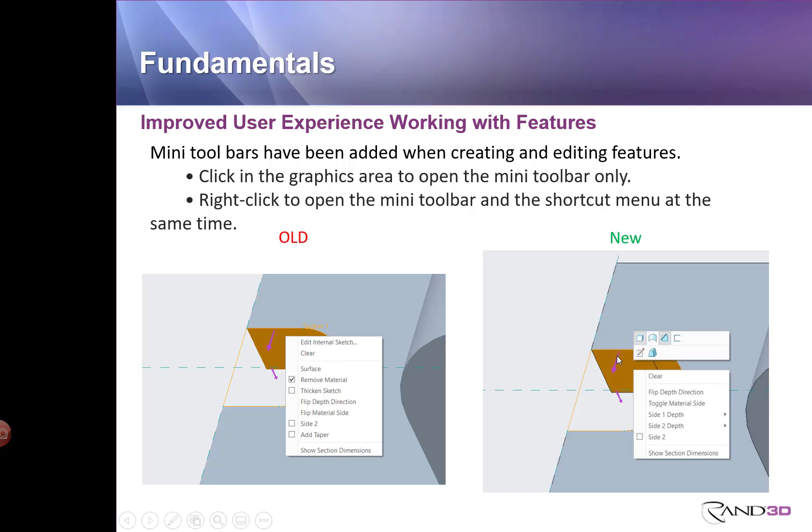You can select on an edge, a surface, a point, or whatever it might be, and it'll show you the mini toolbar of functions that would be available in our dashboard anyway. If you right click, you will see the contextual menu appear. Some of the things that used to be in the contextual menu have now been added to that mini toolbar. For example, Edit Internal Sketch used to be available only if you right clicked on it. Now, when you select on it, this icon gives us the Edit Internal Sketch function directly.

Another update is when you're modifying a feature and you have dimensions, you have the option to have a little window display behind the dimensions. It helps them stand out a bit against the background of the model. To turn that on or off, go to View, go to the Show group, and you have this icon that looks like a little box with a dimension and an eyeball. You can turn that on or off, and it will display the window or turn off that graphics window. The old interface did not have that option.

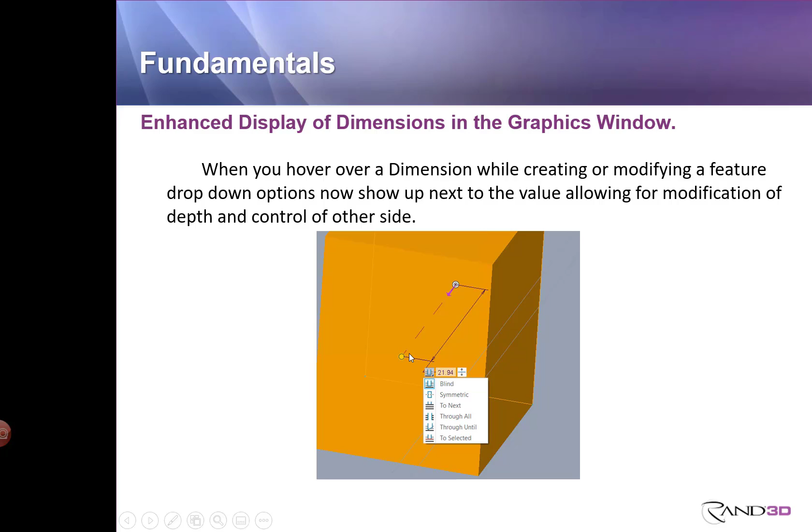Also, when you're modifying a dimension, if you hover over it, it will show you drop-down menus on the right and left side. These are directly attached to the dashboard happening at the same time, so you can always go to the top of your screen to control the dashboard. If I hit the drop-down arrow for the option on the left, it shows different depth options. If I go to the right, I can make it go in both directions, or change what elements I'm dealing with. Before, in older versions, you had to right click on the little dot at the end of the extrusion to get that to show up. This isn't just for extrusion—it can happen in the revolve command or any other command where you're defining a depth or an angle.

An improvement to Creo 6 is that if you have your navigator on the left, you've always had the ability to add columns to the table or tree. To do this, go into settings and customize the tree, and we can add whatever information we want. As long as that information was filled out in the model, it would now show up in the tree.

In the old setup, you had to grab the handle on the right side of the navigator and stretch it bigger or smaller, or adjust column sizes by grabbing the handles and manipulating them. Now, once you add columns, this icon allows you to quickly collapse and expand the tree so you can turn them on when needed and off when they're in the way. Select it once, it collapses; click again, it expands and shows those columns.

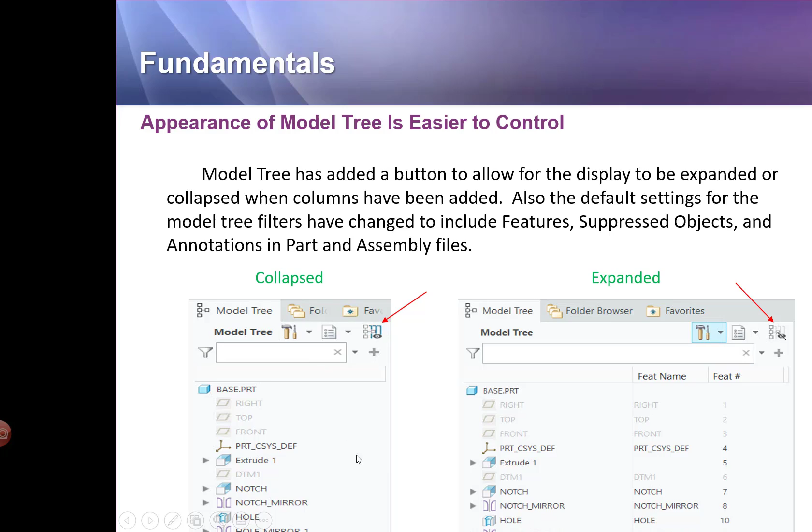Also, a change that's happened is by default, features, suppressed objects, and annotations in the part and assembly tree will automatically be displayed. In older versions of Creo, if you suppressed a couple of objects, they would immediately disappear. You could go to settings and customize the filter to show those suppressed objects, but you had to remember to turn those on. Now by default, they're already turned on for you.

Changing from fundamental changes to part design specific changes: when you're building a datum point, inside the datum point command there's a new project command or function. First, you'll select on an existing datum point, curve, endpoint, or vertex. After selecting the point you're starting from, you'll choose the datum point command. You'll see the point you selected listed here, and if you hit the drop-down arrow, you'll be able to choose project.

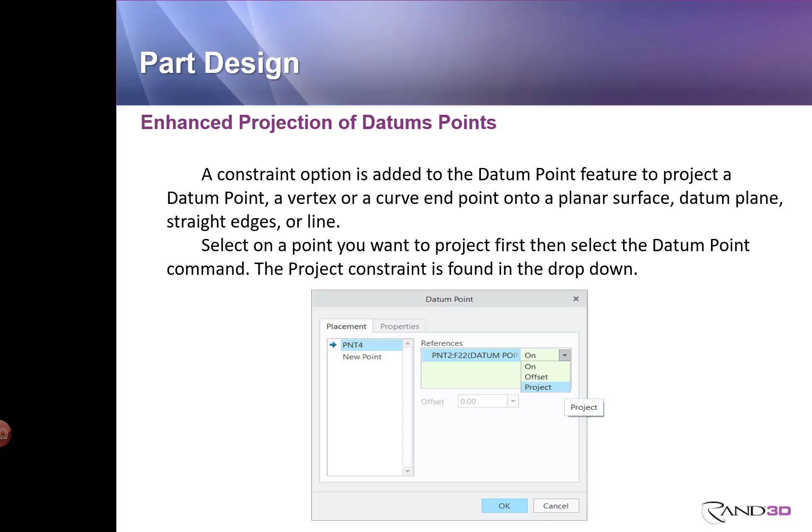Now you get to select what you're projecting it onto. You can project it onto a surface, a datum plane, or an edge or a line. Select on that other reference by holding Control, and when you hit OK, it'll project it normal to that reference.

Also, a minor change you may notice is that when creating an extrusion for the first time, the formula used to guess the value has changed. I don't know how it was coming up with the old value, but it basically picked a number to adjust that extrusion. If it guessed wrong, you had to go in and adjust it, but that number could be all over the place. Now the formula bases it on the sketch you're using.

Here I drew a sketch of a square with sides that were 5 millimeters long. When I go to extrude it, it averages out all the dimensions and comes up with that average value, which, since it was all 5, is the extrusion value. You can change it to whatever you'd like, but it tries to guess how far you want this extruded based on the dimensions you put into the sketch. This involves less zooming in and out to adjust the extrusion value than the older context did.

Another small improvement is when you're building a helical sweep or helical sweep volume, either one, you still build it the same way as before. However, under the References drop-down menu, there's now an option to create a helical trajectory curve, which the old setup did not have. If you check that box, when building the volume or helical sweep, it'll still create the same geometry, but also creates this wireframe helical curve that can be referenced.

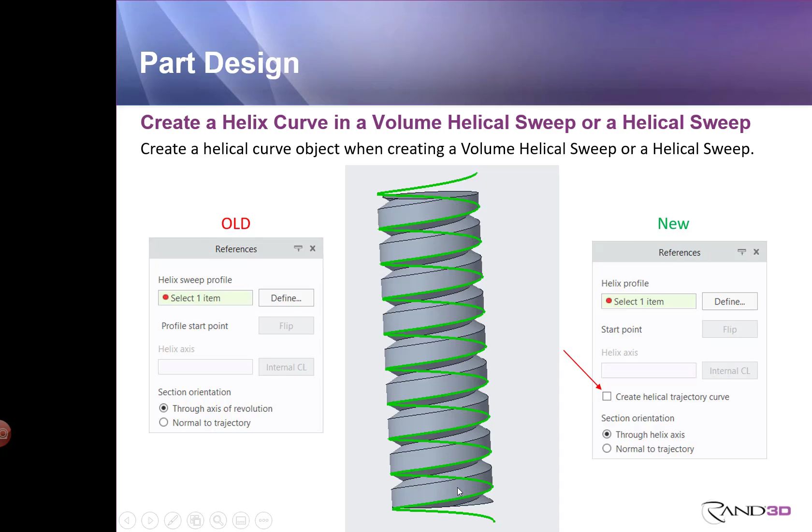The final change for part design specifically is an update to the formula generating your midplane. You build the midplane the same way as before: choose the plane command, hold Control, choose one plane and another plane that are at an angle to one another. The idea is that the formula now guesses better what midplane you actually want and doesn't require you to flip between bisector as much, so it tries to keep it over the model instead of off to the side.

I chose these two green surfaces by holding Control and selecting both of them. It created this midplane, which is at a 45-degree angle relative to the green surfaces. If it does guess incorrectly, which it still could do, you can hit this drop-down arrow and pick the other bisector. It'll move 90 degrees and come in perpendicular, splitting the angle between those two perpendicular planes from the other side.

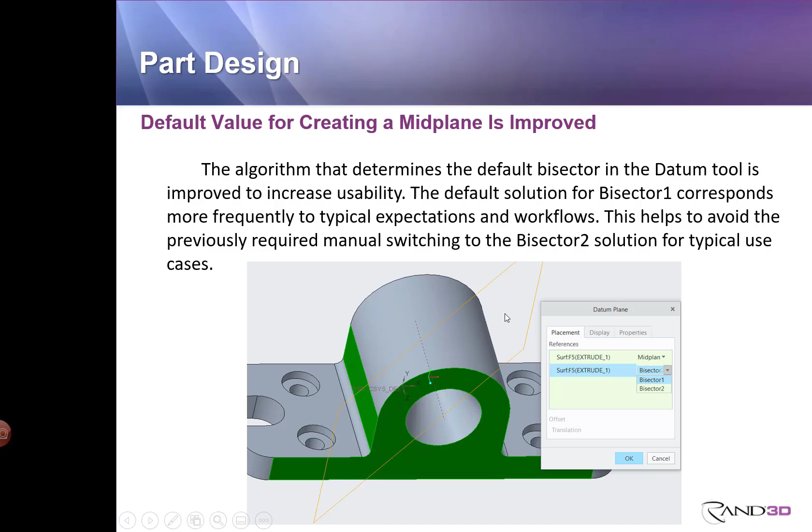Assembly design. So when dealing with assemblies, something that actually works in both assemblies and in part files is the reference viewer. Here I'm showing a part file, but it works the same in assemblies. Reference viewer allows us to see the dependencies between two objects, the parent-child relationships of how they're connected or linked.

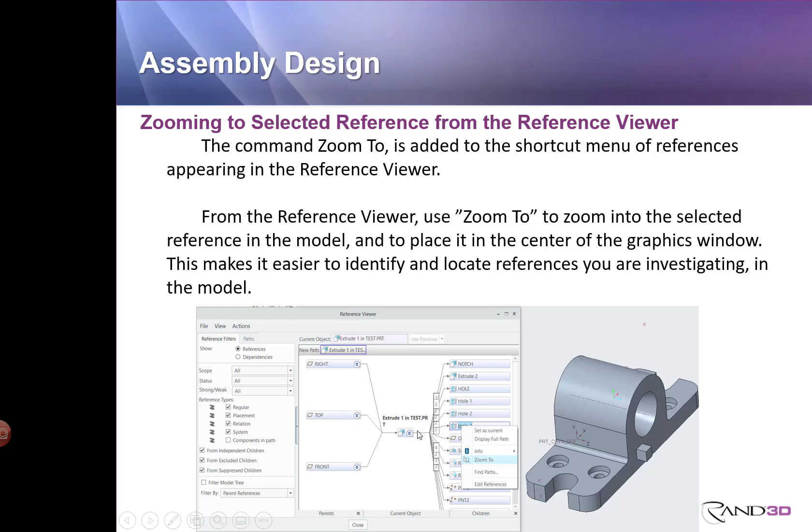However, the new function here is if you select on something, instead of just highlighting, you can right-click and say Zoom to, and it will zoom in on that specific object on the model or in that assembly. So if you've got a large assembly with lots of components, and a small part that you know is constrained to some other bracket or feature, we can see that part, right click on it, say zoom to.

And it will zoom in exactly where it is on the assembly as well. Another improvement that can affect both a part file in an assembly or just standing by itself is the inheritance feature.

Inheritance feature is going to allow us to create customized components from an original piece of geometry. So if we've got a widget and now we want a new widget that's a little bit longer, a little bit shorter, we can have it inherit from the original widget and be able to change the dimensions that make it unique.

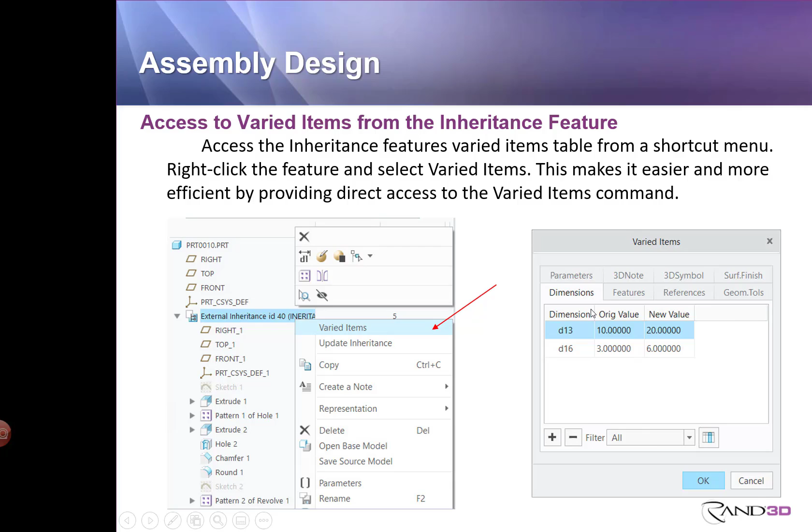The new function here is when you create a varied item, if you right click on that varied item, that inheritance feature, you'll see varied items available to us in the drop-down menu. That wasn't there before. When you select on it, it immediately shows us what dimensions are being controlled and gives us more direct access to being able to control those varied items. Again, you can do that within a part file by itself or within an assembly.

Also, changes within the assembly. We have an update to the insert here and the activate command. So when we're dealing with the activate command, in the old setup, when you activated a component, it would simply put the little green dot next to it.

Now, in the actual display, the part would be its normal display, but all the other parts would gray out. Now, if I activate that same component, it is the same display in the tree where it's white, and all the other components gray out within the tree. So not only is that happening on the display of the assembly, but it's also happening in the tree, allowing you to focus more on specifically that component.

Remember that features are automatically displayed within our Creo 6, whereas in the old setup, features are not automatically displayed. I'd have to go to settings and turn that on to be able to get them to be displayed. We can see that automatically, so that's also different.

The other change with our tree in the assembly is the insert here. In the old setup, insert here was listed underneath usually your top level assembly, and if you were looking at a specific part, it'd be listed underneath the part level as well. In Creo 6, the green line and the blue line represent the insert here. It does the same thing, it just changed the way it looks.

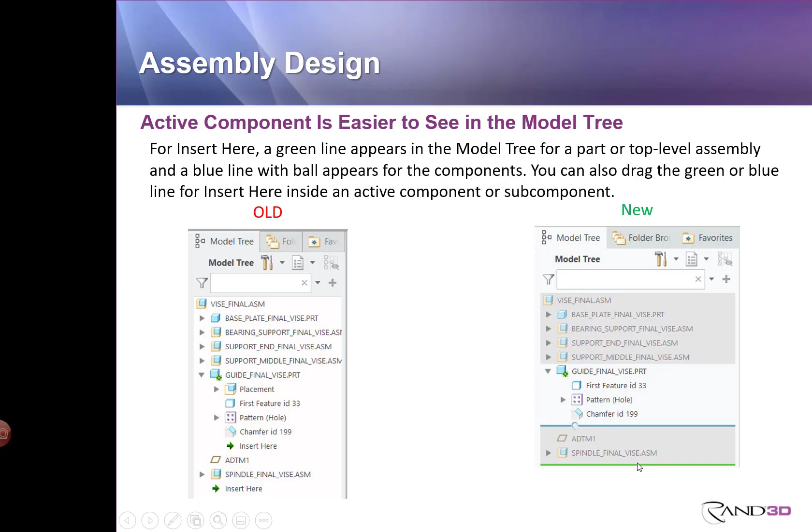Another minor change within Creo 6 is with the intelligent fastener function. If you've already placed one fastener in a hole of a pattern, and then use intelligent fastener to place another one in a different location, if it's going to duplicate that fastener on top of an existing location, it will give you an error message telling you a fastener already exists in this reference and asking if you want to continue.

You can still double it up if you need to, maybe because you're using a different fastener, and then go remove the old one afterward. But in older versions of Creo, it didn't recognize that one already existed in that hole, and you could end up with double fasteners.

Detailed drawings: when doing drafting changes within Creo 6, some noticeable differences are with the note command. Here we've already created a note with a leader line. We're modifying it, so we select on that note. If we want to modify the text, we can click on Text Editor, which allows us to type in whatever text we want and insert symbols.

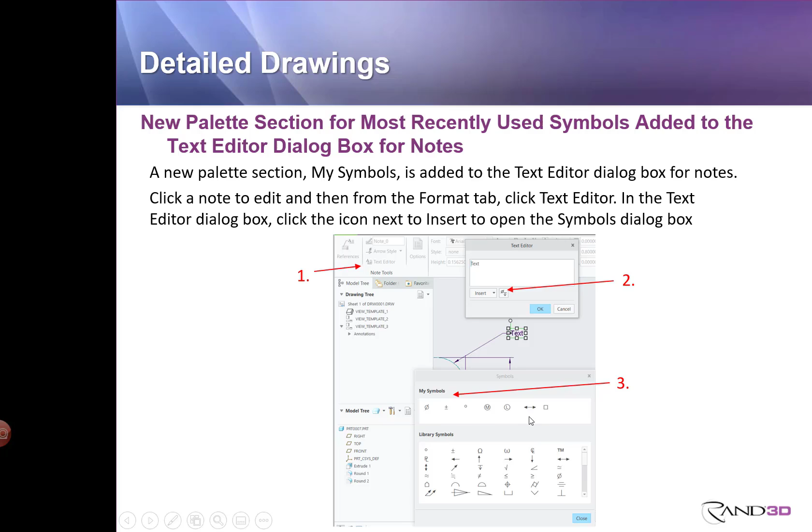If I choose this icon here for symbols, something new is the ability to have my recently used symbols separated from the entire library. If you're constantly using certain symbols in your drawings, they'll automatically be displayed here. As you pick a new symbol, it shows up first in the list and the oldest one drops off. It keeps a running total of the 7 symbols you've used recently, and when something else gets used, the oldest one drops off to make room for the newer one.

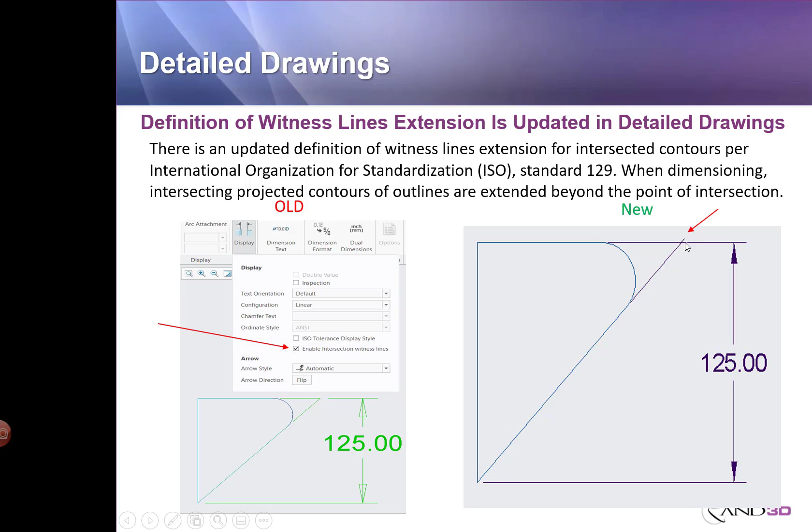Another change you may notice in detailed drawings is when you create a dimension where a witness line is needed. For example, here we have a round placed on this corner, so the corner no longer exists, but we want to measure to where that corner would be. I know you can just select this line and get the same thing, but some situations won't allow that. In the old display, with intersection witness lines enabled, it would just come to a point. In the new setup, those lines overlap one another slightly. The depth of that overlap can be controlled through settings in Creo, but by default there will be overlapping as opposed to just a connecting dot.

Also with notes, there were a number of changes. One is that the general interface for the dashboard has been updated. Here's the old interface, here's the new interface. You can see there are a lot more commands and customizations that can be done.

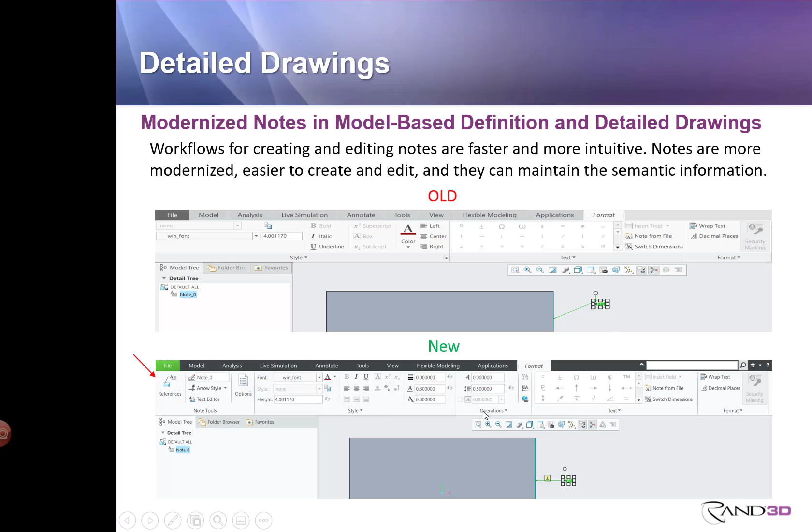Also, when placing a note, if you select the reference you're tying it to, like this side, as you go to place the text it will snap to different references. Here I moved it out where it's going to be perpendicular to that line, it shows it snapping there and I can place it. Or if I moved it up, it would show it's tangent to that line, along with all the other references you can customize and customization of semantic information to make sure it's meeting your standard.

Another update, which in my opinion is well overdue, is within the detailed drawing functions of Creo when building a new drawing file. So File New, select drawing from the list. There's a checkbox to use the drawing model file name. Whatever CAD file you're generating this drawing for, whether it's a part or assembly, if you check that box, it'll automatically make your drawing file have the same name as your CAD file. If you turn it off, you can type in whatever name you want, but it will automatically link the two and make them share the same name, which is usually what we want.

Another minor modification: if you're dealing with a table and click in a cell, the delete key will now delete the contents of that cell. Before, the delete key would delete the entire table but would not delete the contents. In the past, you had to click delete contents, either by right-clicking and choosing that, or going to the dashboard to grab it. But now the delete key will also allow you to clear the contents of a cell.

And the last set of changes we're going to cover is sheet metal functions within Creo. The first thing we're looking at for sheet metal is the flat feature.

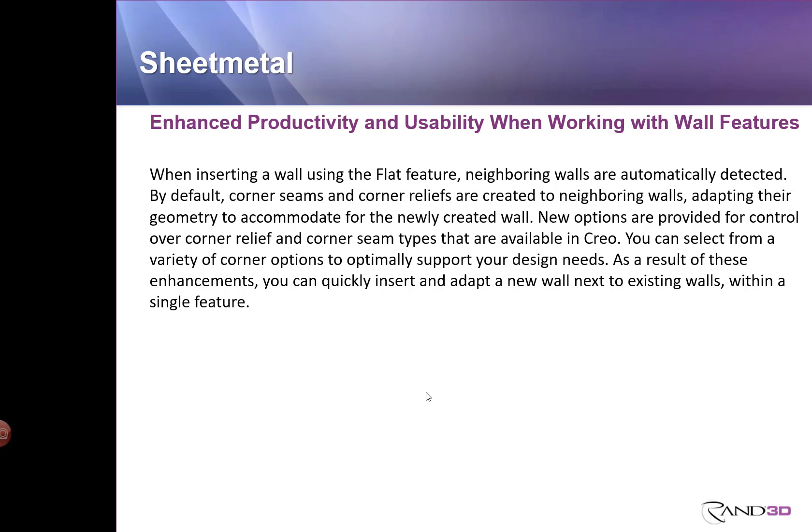When using the flat feature to create walls, it will automatically detect neighboring walls and allow us to adjust the reliefs and corner seams of those neighboring walls without having to go back and modify them or build something on top of those elements. To show you examples of that, here I created a sheet metal bracket.

I had one wall already placed. I'm building a secondary wall that happened to butt up against it. In that secondary wall, before hitting the complete function, I went to corner treatment, one of the menu options, and chose corner 1. I can adjust that corner and automatically adjust the neighboring wall as well.

So when I say create with seam with a gap, two times the thickness of my sheet metal, it gives me this result. If I change that from gap to open, it gives me this result where they're butted up against one another, but the bottom is open.

I can choose with overlap, and here one side is overlapping the other, so the front wall is overlapping the side wall. And here we flipped it by hitting the flip command. Now the side wall is overlapping the front wall.

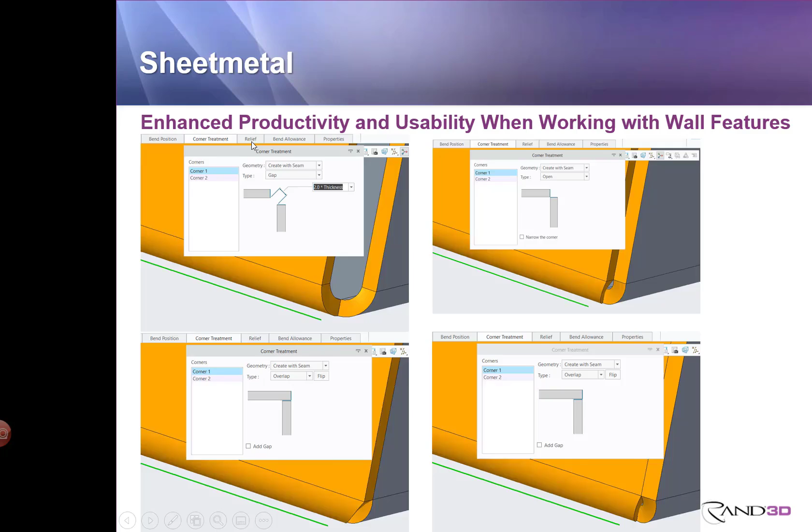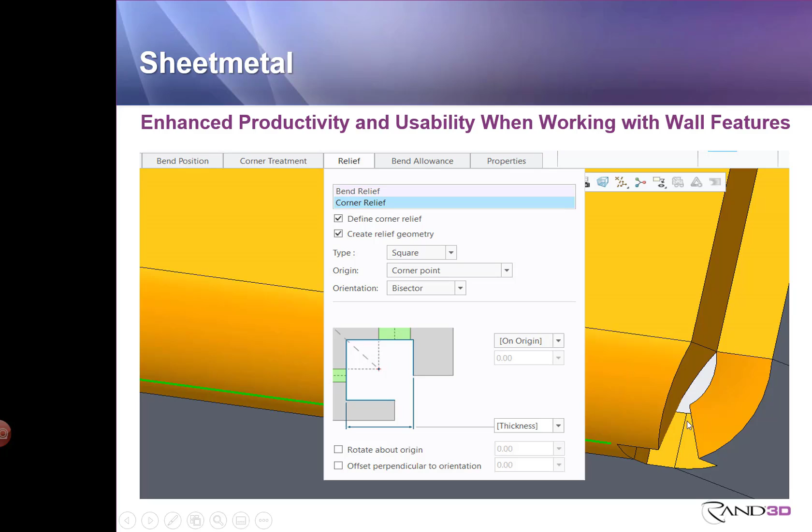Also, if we go to the relief tab up here at the top, it gives me options to customize the corner relief. I can select on corner relief, choose my type. Here we did square, we could do round relief or tangent or whatever we might need. And it adjusts that corner relief for both walls at the same time.

Now the mini toolbar does come into play when dealing with that flat or flange command. So as you are working with it, if you select on different references, you will get options to appear, allowing you to control the reliefs and control the bend, a little bit more quickly than necessarily having to go to the dashboard and choosing those options.

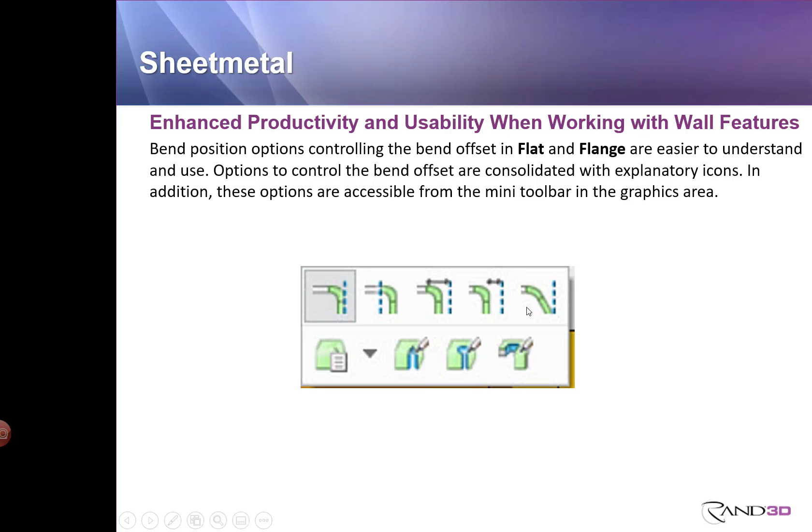Another update to Creo 6 regarding sheet metal is improved regeneration performance when dealing with sheet metal cuts. So when you hit regenerate, it's supposed to regenerate faster. It does this by ignoring certain types of features that have not been modified from previous steps. So if you build 20 features on top of one another and then build the 21st, if building the 21st feature didn't modify the first 20, it won't have to regenerate all of those. It'll just regenerate the ones that have been changed or modified, and should update faster for us.

And the last thing here is the merge wall command has been modernized. Basically, the interface looks more like the standard Creo dashboard interface than it does the old Pro E interface that, if you've used Pro E in the past, you may be familiar with.

To find your merge wall, you would go to our sheet metal function, go to model, and I believe it's under the edit group, in the drop down menu. There's a merge wall. The new function will show us this, where we're able to select our references and our drop down menus.

The old interface gave us a contextual menu where we were able to add or remove elements, define our features, and hit OK to complete them. Here we're able to hit the check mark.

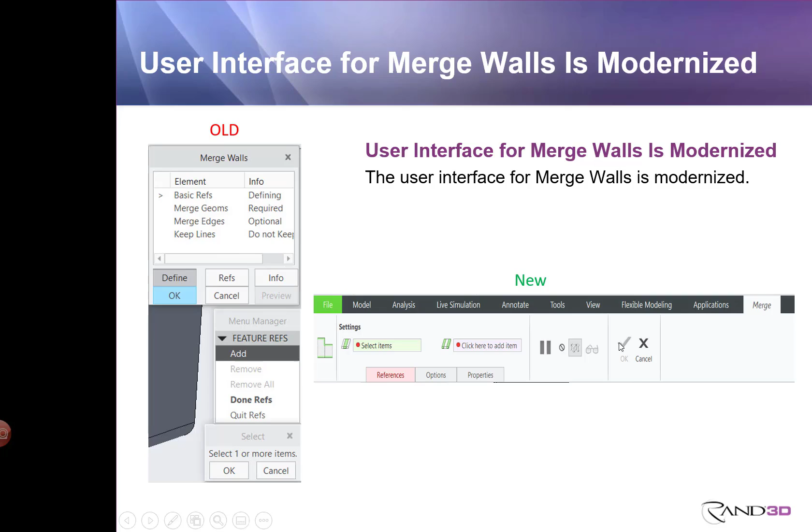And those are some of the updates, most noticeable changes and updates to Creo 6.

Taking a look at some of the fundamental changes that we have in Creo 6, the first thing you may notice is that some of the commands do have a different dashboard design to them. So for example, if I come over here to extrude, the icons and where things are located in the dashboard have changed.

There's also kind of a description describing what is involved to create that feature. Here we're looking at extrude. If I hit cancel and go to build a revolve, we see that things are just located in a different spot, though functionally things still work the same way. You may notice a different slight design change.

Other changes are that while the mini toolbar is something that was added in 4.0, the mini toolbar is also available when editing a feature, not just when creating a feature. So you may have been familiar with, if I select on something, getting the mini toolbar to pop up when you're going to modify an element.

However, when you go to modify that feature and actually get into editing that, the edit definition, now if I select on an element, we get a mini toolbar that pops up as well, allowing us to get to most of the same options we have in our dashboard.

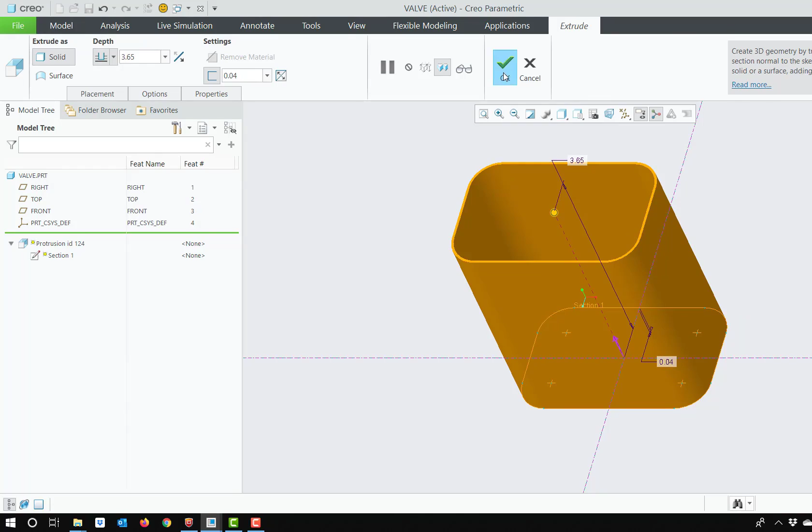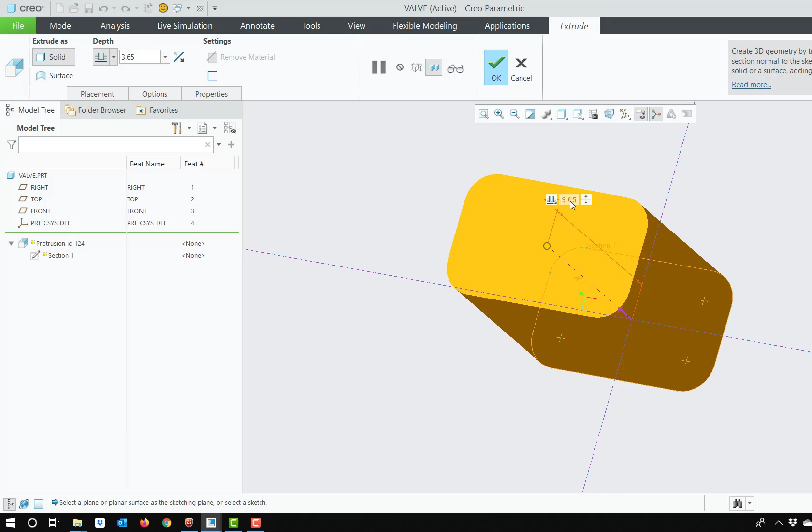Another change you may find - here I created modifications I don't want, so I'm going to undo those - is enhanced display of dimensions. If I select an element I want to modify and say edit definition, we will see there's a box around the dimension, and when you hover over that dimension, you will see drop-down menus that allow us to get to options that would normally be available in our dashboard or mini toolbar. So here I can set my depth to be a blind depth with a value, make it symmetric so it goes in both directions, or select a reference it's going to go up to.

Now I've changed it there. I can come back up here and change it back to a static value. Also, you'll notice it puts this little white border around the dimension - that color can change - but this border helps it stand out away from the model you're working with.

If you want to control the look of that, under View, under the Show group, there's an option to turn that on or off - Dimension Background Display. Right now it's being displayed. If I turn that off, go back to Model, back to Extrude, and set that value, notice there's no border around the text, so it might disappear into the model or be harder to see. It doesn't stand out like it would normally. Hit OK to that, and we'll be able to do it.

One other general or fundamental change you might find with Creo 6 is when you customize the tree. Here I've already customized it so we have a feature name and feature number listed in the tree. Now you can customize this again by going to Show - this hasn't changed - or actually going to the Settings option, going to Tree Columns, and being able to remove or add elements to the tree.

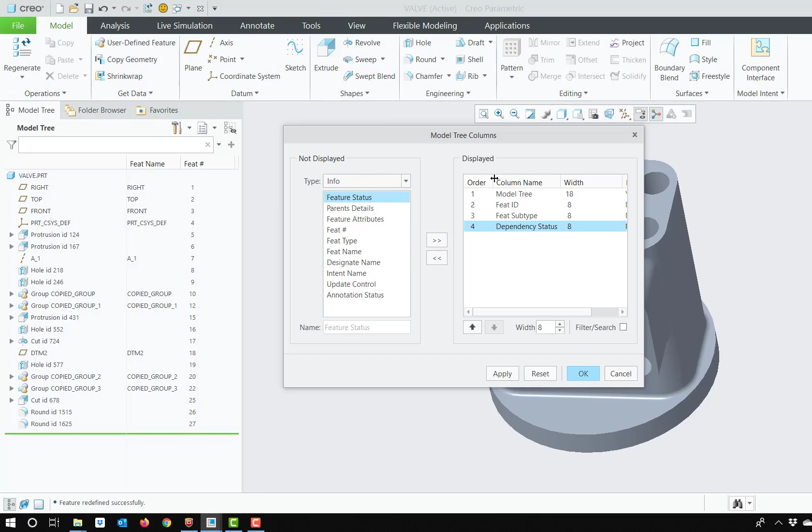When you add those categories to the tree, there are different ones to choose from: model parameters, feature parameters, layers, whatever it might be. But as you add those to the tree, you'll get different columns to appear. Now that's something that's been in Creo, isn't new. But what is new is this toggle to control the visibility of those columns. If I click on that, it will minimize so they're no longer displayed. If I click on it again, it will expand the tree to list all the changes you've made, and you can customize that look fairly quickly.

So those are some of the changes we have to the fundamental design in Creo 6.

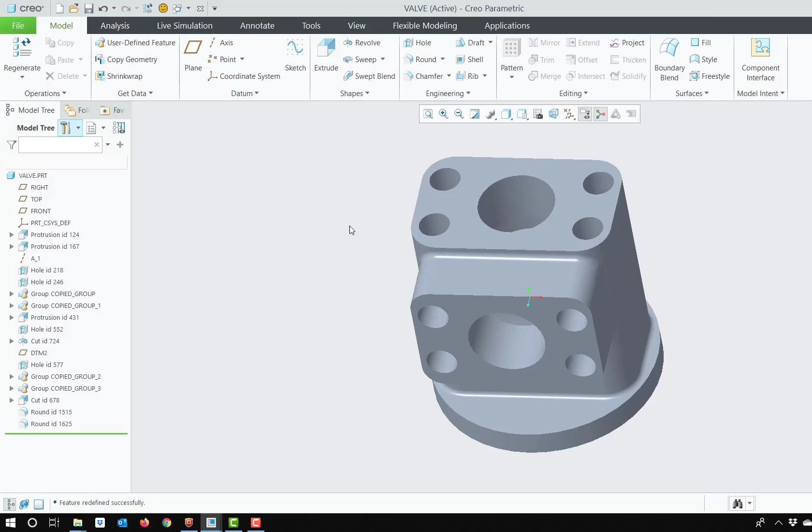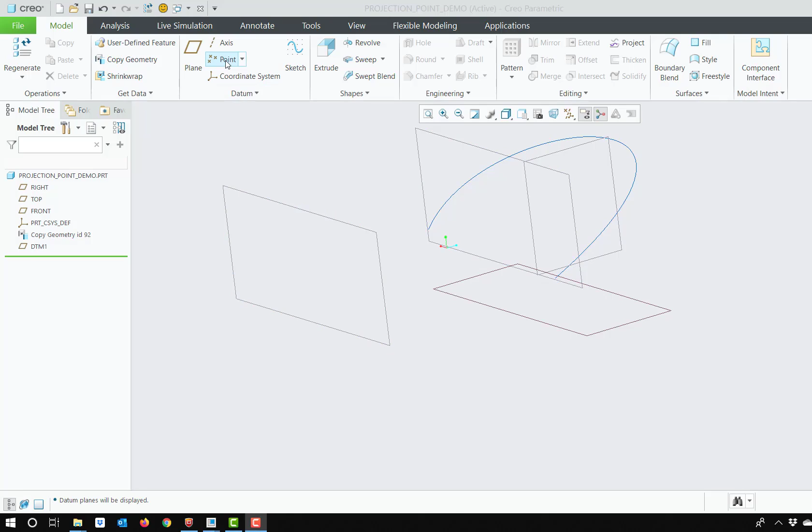Here we're going to take a look at Creo 6.0 updates regarding part design and how things may have changed. First, we're going to look at the projection point function. If I have geometry, in this case a curve, I want to take the endpoint of this curve and project the point onto a surface - we'll go with this datum plane over here. I'm going to click on the point command, choose the endpoint of that three-dimensional curve, and then holding Control, select the new datum plane.

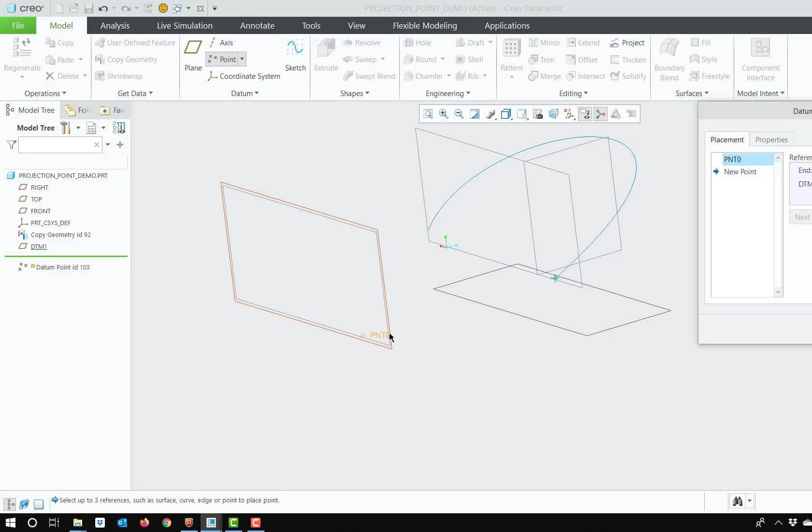Now it's trying to build references, but what's new here is under offset, we can use project instead. It's going to project that point onto the datum plane and give us point 0. Now it creates that datum point there. Make sure we're actually seeing it - I'll turn that on and we can see it from the side.

If I want to project a point down onto the datum plane below that curve, again I would select point, choose the endpoint of the curve, hit the drop down arrow here and choose project, and then select the datum plane it goes down onto.

Okay, select OK, and it projects that point down into that location.

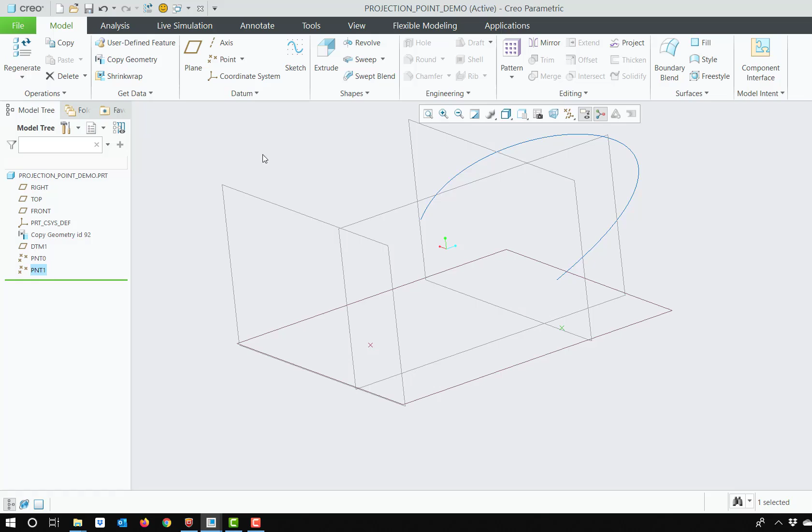Another update to Creo 6 is our default depth for extrusions. The way it's calculated to come up with your default value for extrusion has been updated to try to guess a more accurate value. What I mean is if I build a brand new part, build a sketch, place it on that plane, and draw a simple rectangle, it gives us our default value here, actually a square.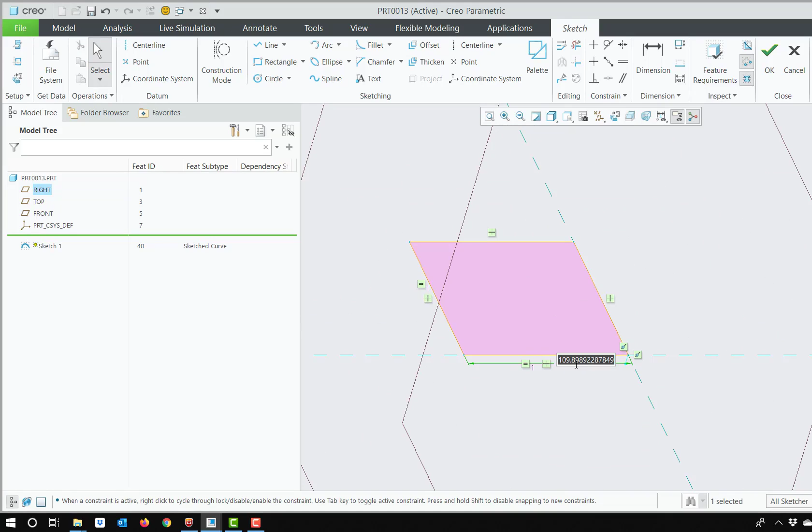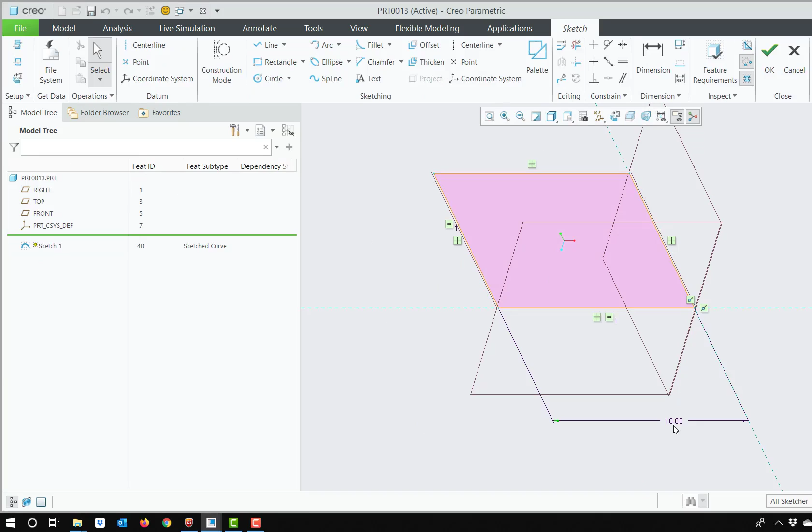I'm going to set that to 10. With that value of 10 being the only value it has to calculate with, when I hit OK and tell it to extrude, notice the extrusion length is set to 10 automatically. If I hit cancel, go back into that sketch, and modify that 10 to be 200, when I go to extrude and select on that extrude distance, it automatically comes as 200.

This value doesn't necessarily have to match the one value we have in that sketch. It's just an oversimplified display of it, but it tries to take the dimensions in the sketch and average them to come out with a reasonable extrusion length. You can always change this to be whatever you'd like, but it doesn't just guess a number. It actually interprets the dimensions of the sketch to figure out what thickness we might want, or at least a good starting point to work with.

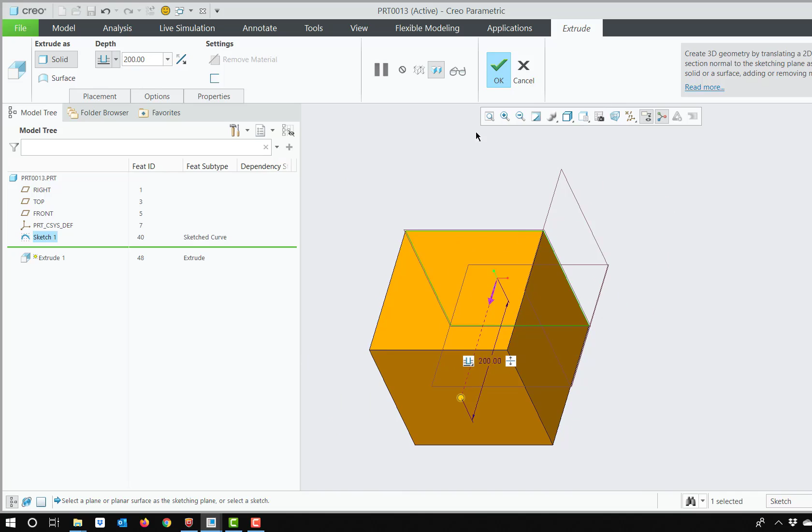Another change in Creo 6 is within the helix curve option. If you're building a helix curve, I'm going to build a new part again. To build this, I'm going to perform a sweep, we'll do a helical sweep. It also works with the volume helical sweep if you're building that, but either way the approach for building the helical sweep is exactly the same. There's just an added option to have a helical curve created at the same time.

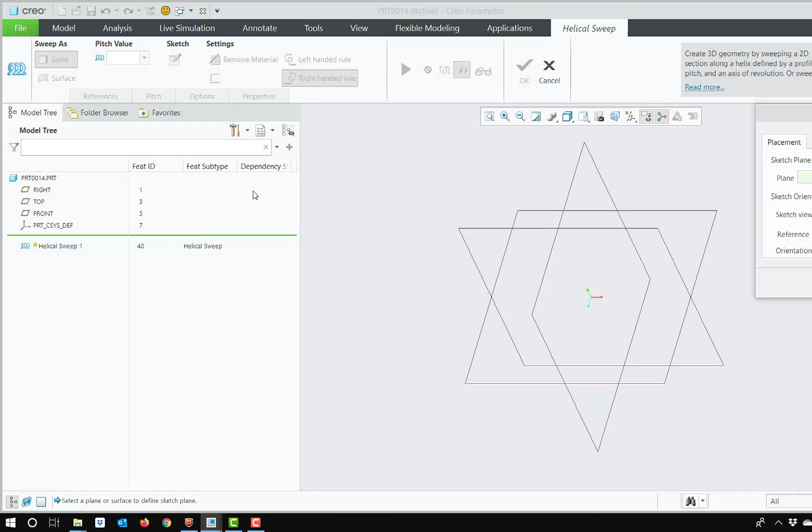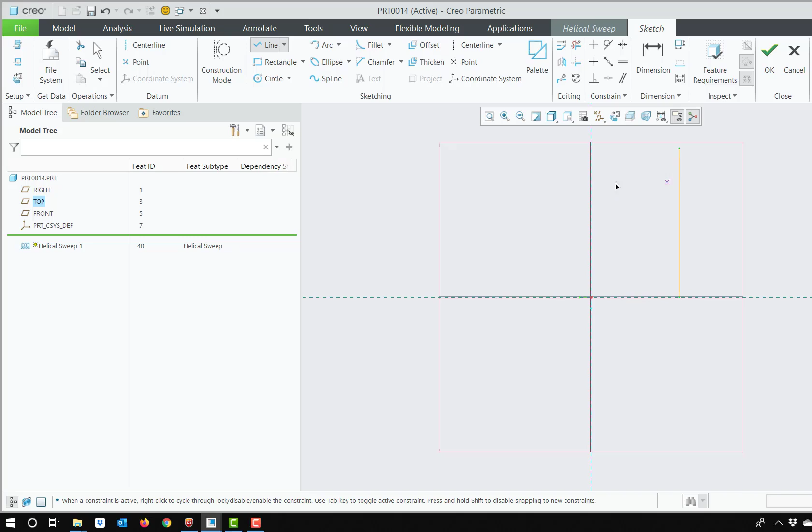So to build this, I'm going to go to references. It's asking me what profile do I want to use. I'll go to define and select a datum plane to use as my profile. When building a helical sweep, you draw a center line that your helix spins around, and a profile that your helix will hit each time it spins, which basically defines the radius of our helix. I'll define a diameter from that line to the center line, hit the middle mouse button to get the diameter value, and set that to 150 as the diameter. The height will be 250, and I'll hit OK.

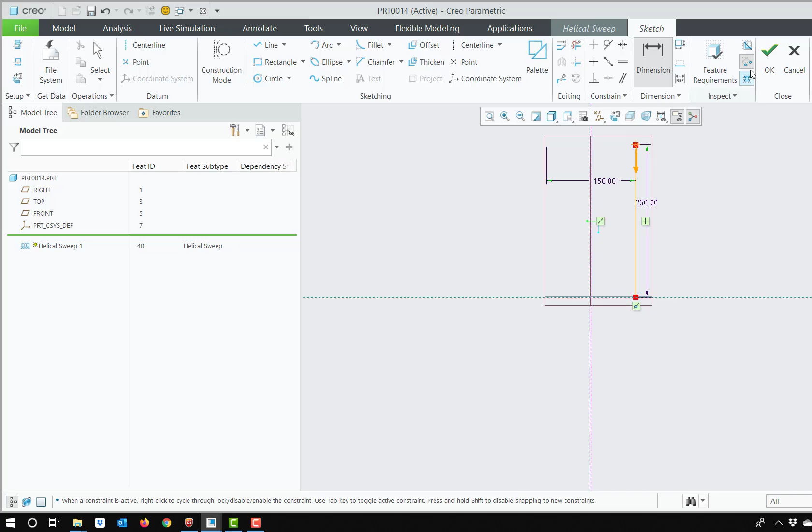Now I still have to define what the cross section is going to be. If this is going to be like a spring, I can draw my cross section, start with my circle there, and it creates that spring we see here.

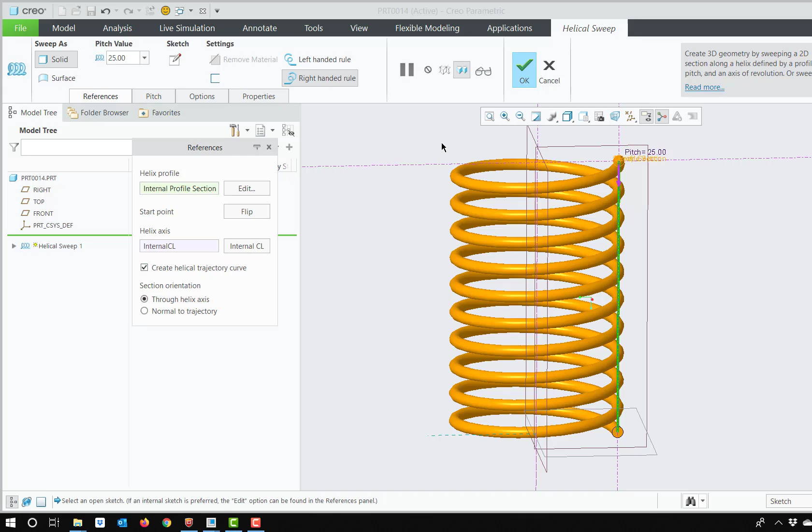Now this is what has been added. If we go into references, there's a new option here called Create Helical Trajectory Curve. If that's turned on, when I hit OK, it not only creates the spring, but it will also create a wireframe curve. The wireframe curve here is covered up by that solid.

What I can do is change my rendering style. Let's go with wireframe. There we go, now you can see that curve down the middle. If I was to modify that, go back to references and turn off the helical curve, it'll still build the spring, but it doesn't build the curve down the middle.

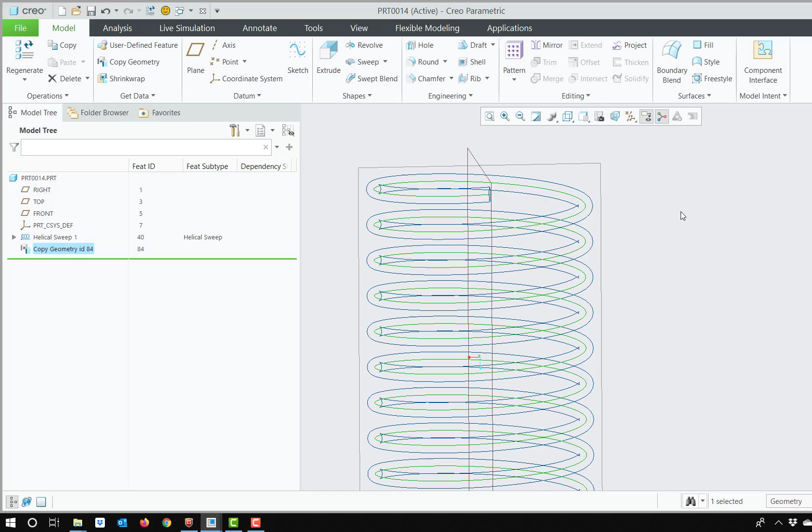If you want to reference that curve later, what you can do is modify this and turn that back on for the helical curve. Now we have the wireframe. I can select that wireframe, which selects the whole feature, but I can copy that geometry and paste it right back into the same location. Now I have just the curve by itself that I could use for other sweeps, for measurements, or for whatever else I'm trying to get it to follow.

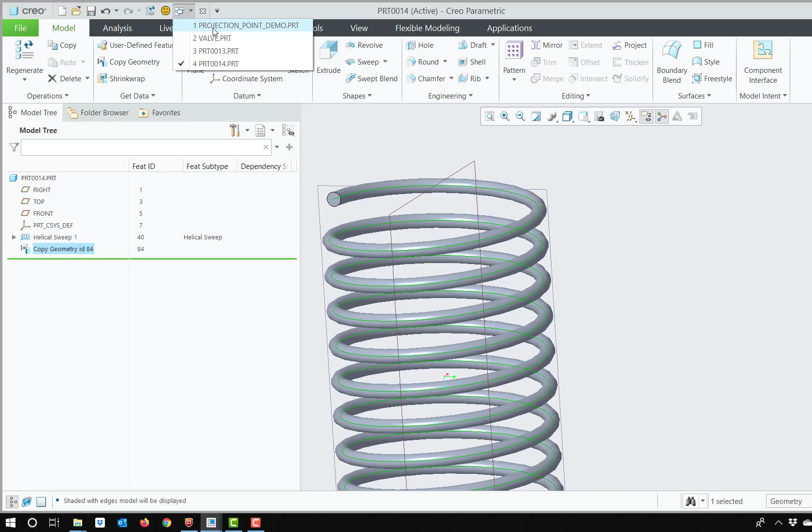Again, I can change my rendering style back, and we can see the wireframe curve in the middle of that spring, or if you're doing threads or anything else where you might need a helical curve. The last thing that was updated to the part design aspect of Creo 6 is the midplane option.

The formula used to calculate what your midplane is going to be has been updated to hopefully guess the right midplane from the beginning, so you don't have to flip it as often. Not a big change, but you might notice a difference.

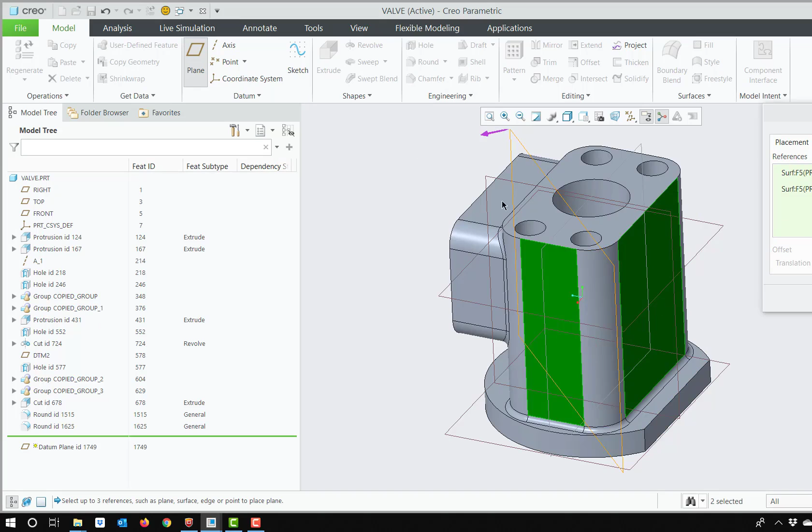For example, I'm going to build a datum plane. I'll select two surfaces, and it automatically comes up - the idea is that it's going to guess the midplane of those two datum planes better than it did before, with less having to come in here and say no, bisector 1 instead of bisector 2. Okay, so it puts it between those two datum planes.

If I came in here and tried to select two other datum planes, so I'll grab that surface and we'll grab that one, it tries to find the midplane for us of those two, which I'm getting a 45-degree plane between them. Usually it's just trying to put it through the middle of the model instead of off to the side of the model. And those are some of the changes that you may notice in part design within Creo 6.

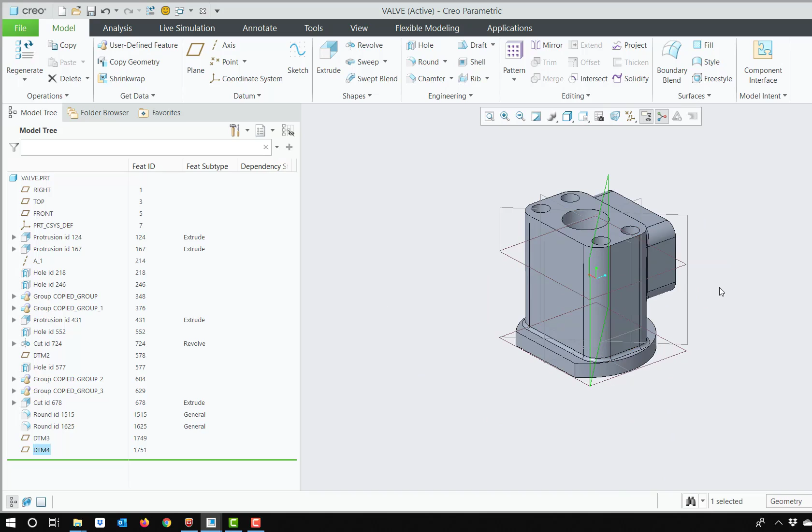Here we're going to take a look at the Creo 6.0 updates to the assembly tools.

One of the first changes that you might notice is if you're using the reference viewer, that's found when you open an assembly, going to Tools and clicking on Reference Viewer. If you are selecting on a specific component, which I should do that first, go to Reference Viewer. It shows us the hierarchy of how things are connected with parent-child relationships and how those relationships are defined.

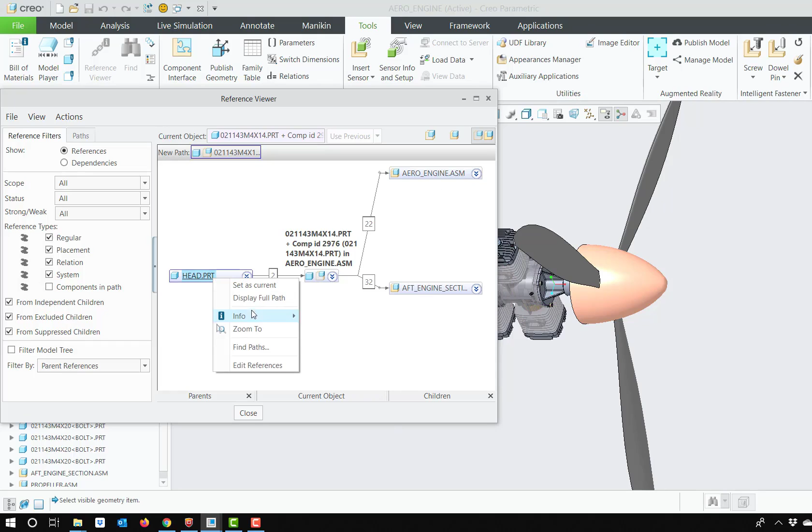But if you want to be able to find that element on the model, not only when you hover over them will it highlight those parts, but if you right-click, you can say Zoom to, and it will zoom in directly on that component. If I right-click on this one and say Zoom to, it shows me where that one exists.

Another function that's available in both parts and assemblies is changes to the way in the inheritance feature can be controlled and modified through varied items.

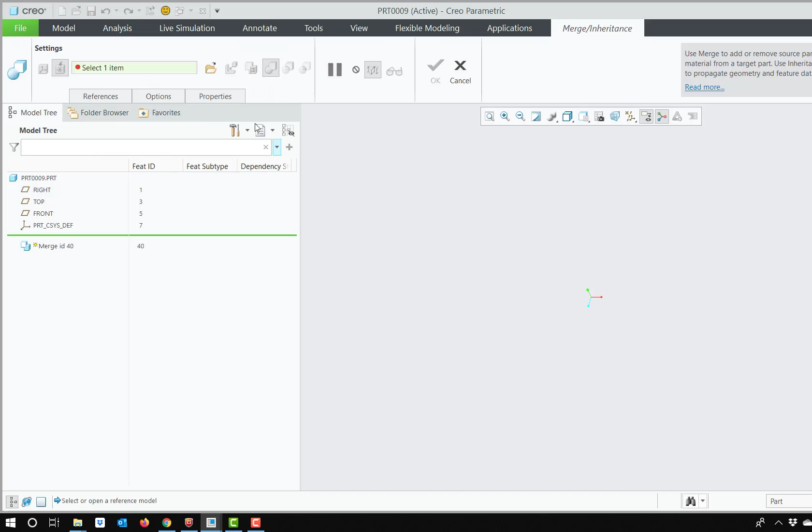To do this, I'm going to create a part file. Works with assemblies as well when the parts are used within an assembly. I'm going to go to Get Data and use Merge and Inheritance. We'll be able to go to select the file we're inheriting from.

We're basically trying to create a varied dimensions for this part. Mine is placed in here. I have this inheritance demo part - it's just a part with different features added to it.

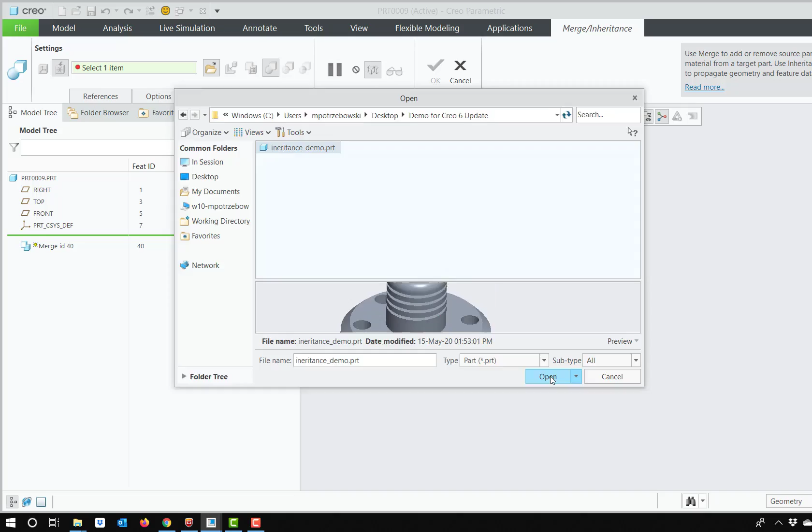We need to place it in our new part, so we're making a copy of it. We'll set it as the default location where the datum planes match on top of the datum planes of the new part.

With that, I will switch it up here to toggle inheritance. None of this should be new, and I'll be able to place it.

But if I want to modify the varied items, instead of having to go to edit definition and modify them through the options menu, what you can do is simply select on it in the tree, right click, and we have this new varied items option. When selected, it allows us to define which elements we're varying.

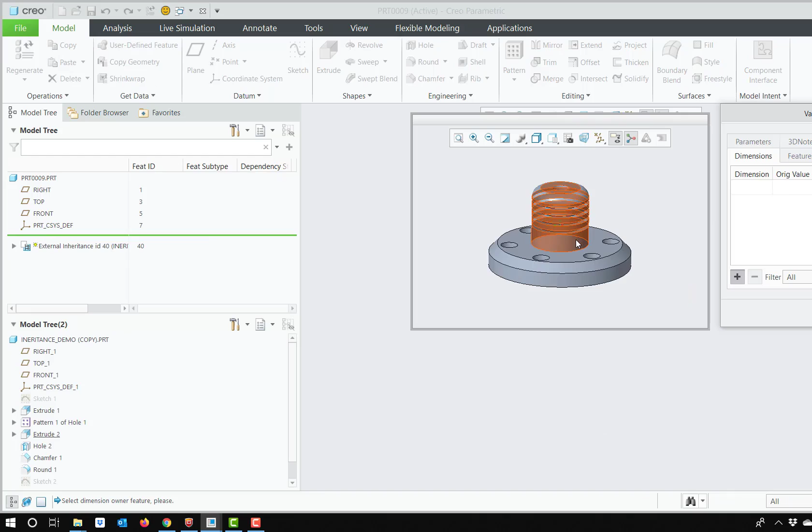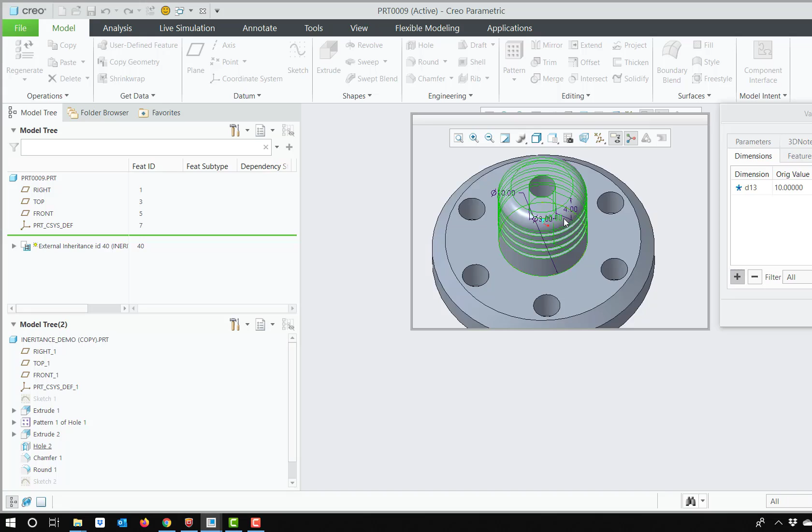So on this new component we copied from the original, maybe I want to adjust the length of that extrusion. The new value is going to be, let's say 50 instead of 10. And maybe I also want to change by adding that hole. We'll say that the diameter of that hole instead of 3 is going to be 7.

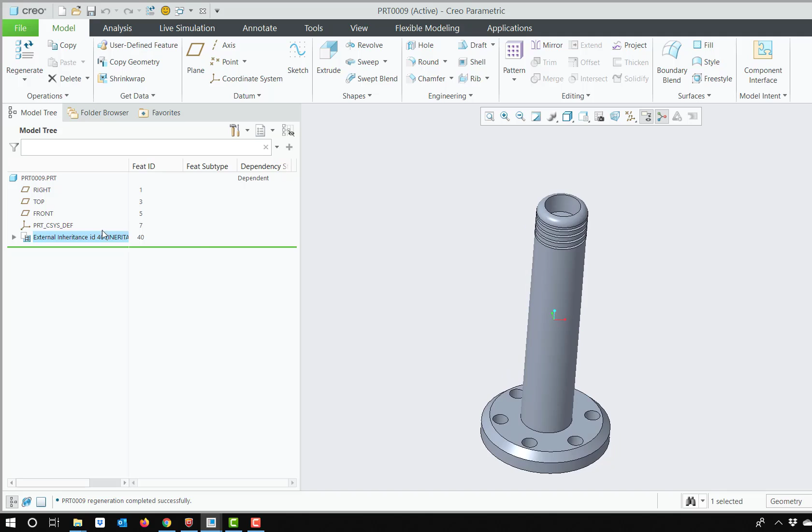Now, in this new component I've created, I have that varied item where it changes to those lengths. The diameter of the hole is 7, the length is 50. And if I ever want to make modifications, I can select on it, right click, and choose varied items again to be able to make my changes. So that is new. Something else that you'll see with assemblies.

I go back to our assembly. The insert here that controlled what you were building and where it was going has changed. So if you look at the bottom of this assembly, it no longer says insert here. Instead, it shows a little green line.

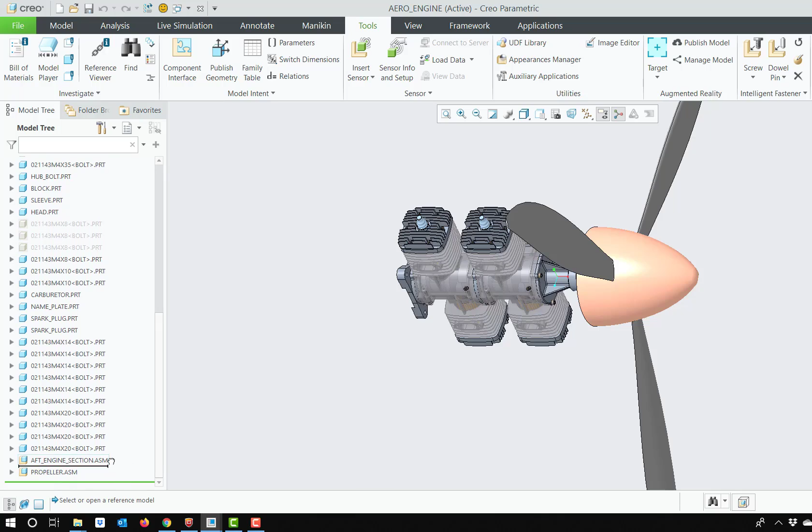You can drag that green line up to a different location of the tree, and now the insert point, instead of saying it, is located here with the green line, and if I was to add a component, it would be dropped in at that spot. Notice the other components have been deactivated or suppressed, so they're no longer showing. I can grab that and drag it back to the bottom, and I see those components brought in again.

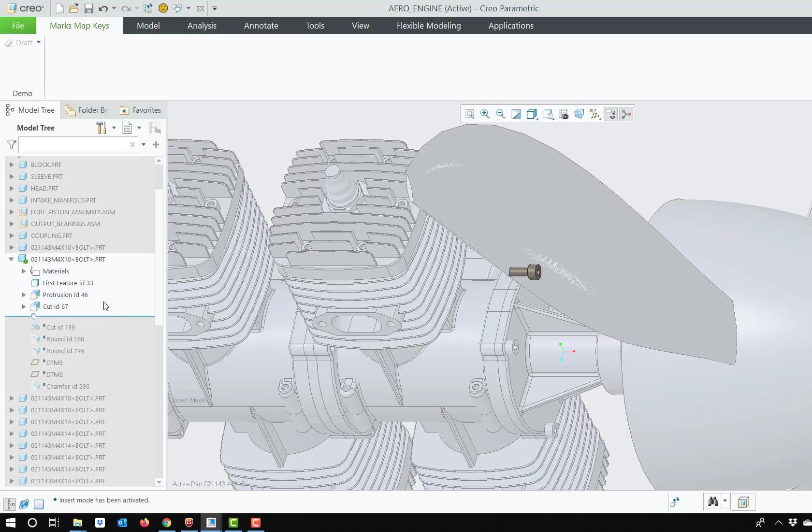If I was to activate a component, I come in here and say activate that part because I want to modify it. It now also grays out not only on the screen but in the tree as well. There is an insert here for that specific component, the blue line. I can grab it and drag it up higher in the model, so we see the model get simplified back to its basic shape.

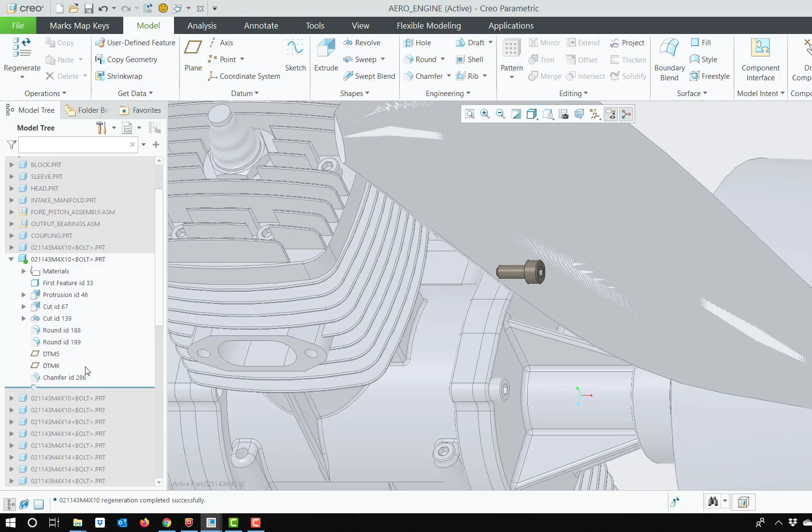I could build a new feature, so if I came over here to model and wanted to drill a hole in it, I could build that hole and it would come in directly after the first feature. I can drag that down to see some of the features come in. Again, it just replaces the insert here. And then I can activate my main assembly to be able to work on the entire assembly again.

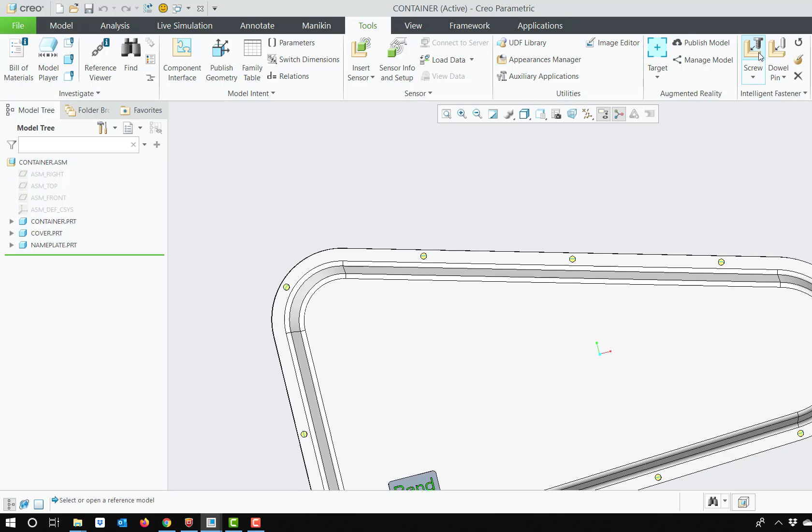One other function that has changed within our 6.0 Creo is if I go to this assembly here when I want to insert bolts, we can go to Tools and go to the Intelligent Fastener section. I'm going to place my Intelligent Fastener by choosing the curved surface, holding Control, choosing that face, the top for the bolt head, and that face for where the nut will go, and place it.

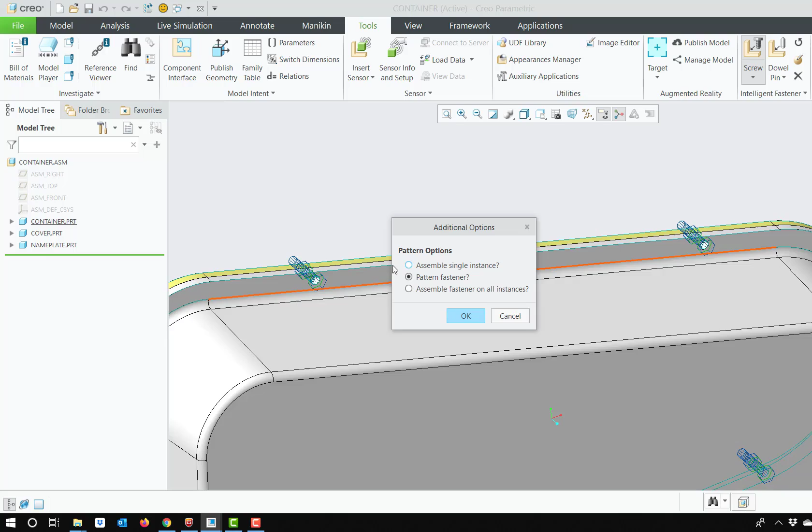Now that's the same, that hasn't changed. Once it's been placed, it's allowing me to choose if I want to put it in all the holes or just in one. I'm going to put it in just the single instance. Again, that's no different.

But now if I go to insert more, if I accidentally insert it where it's going to place them through all the holes and I already have one taken up, it will now give us an error message letting us know that there's already one in one of the positions. So to do that, I'm going to go in and insert it into this hole, grab that surface, grab this surface, hit OK. Here's the error message that comes up.

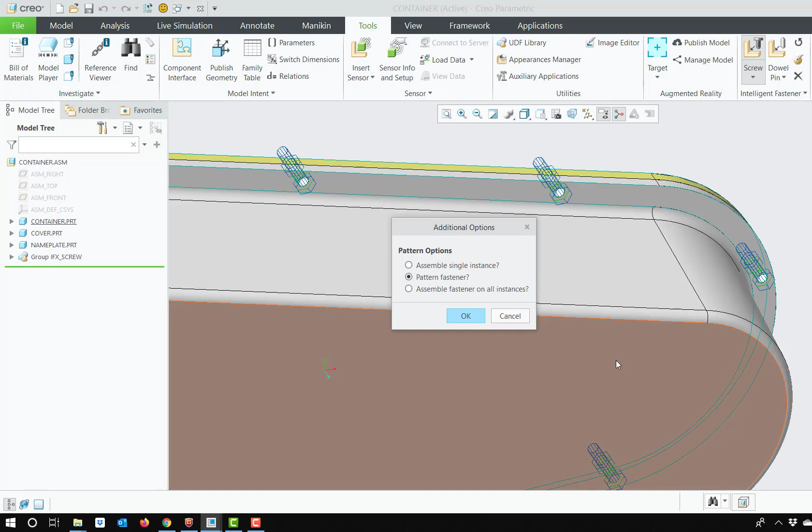A fastener exists in this reference. Do you want to continue? You can say yes, and it will duplicate in those locations as well. Or you can say no, but now we're able to define where we're placing them and how we already have one in that location.

Those are some of the updates we've seen for assembly design within Creo 6.

In this demonstration, we're going to take a look at the updates to the detailed drawings inside Creo 6.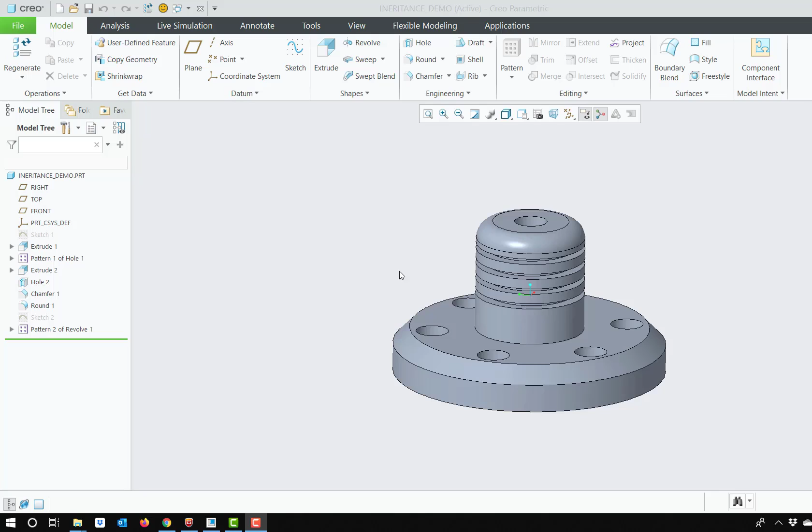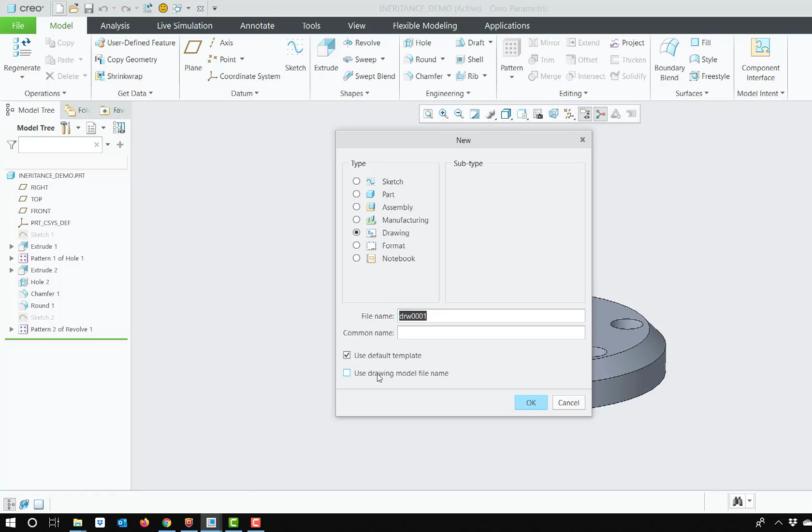First, we're going to see that if you build a new drawing file, there is an option that's been added to be able to automatically name the drawing file after the part or assembly that you're linking to it, so you don't have to manually type that in. By having it turned on, it will automatically generate the file name. If you turn it off, you can put in whatever you'd like. But now when I hit OK to this and hit OK to my new drawing window, it has the exact same name as the CAD file that I was working with.

Another update to the detailed drawing tools: if I go to create a note, so I'm going to come in here with a note with a leader line, we have different references we can select on, but as you select on them, it will snap to different positions. Notice it's laying tangent to that line or laying perpendicular to it. Once that note with a leader line is placed, just place it, I'll hit the middle mouse button to place it there. I can write out my text, and the interface for the text tool has updated as well, giving us new options. We'll go ahead and place that.

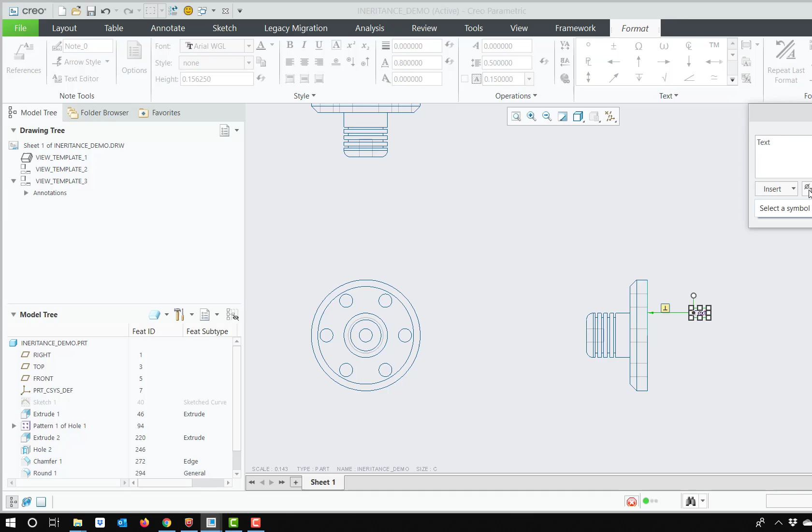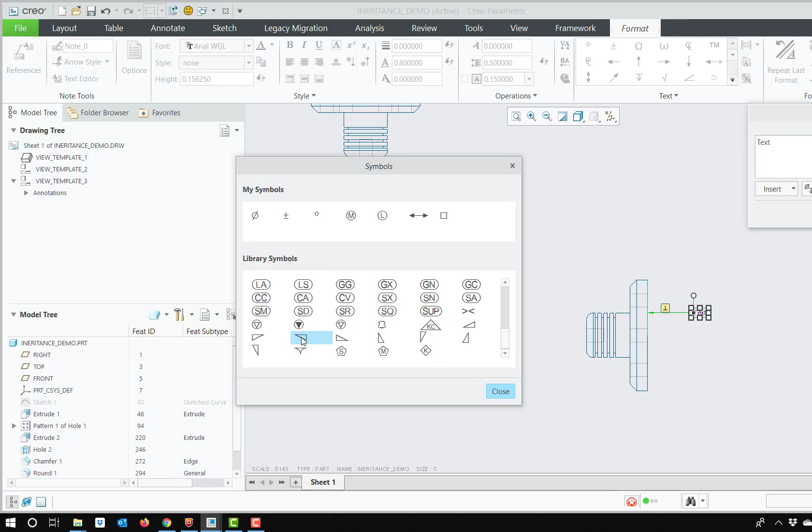With that being placed, if I go back and modify that text, we'll again see the updated interface. Inside the text editor itself, there is a new function for being able to use symbols. Now, we could insert symbols before, however now, if you're constantly using the same types of symbols over and over again, it will automatically lay them out here in this My Symbols category. The 7 most commonly used symbols will be listed here, the ones you've used in the past. If you start using other ones, they will replace the older ones up here. But I could choose one of my symbols from here, and it'll replace the old symbol and include that into my text field.

The next thing I want to show you that is a difference in Creo 6 is when you build a dimension on a location where two lines would intersect but don't actually intersect, like theoretically to this corner, what I would be able to do is select the select intersection, choose the two lines.

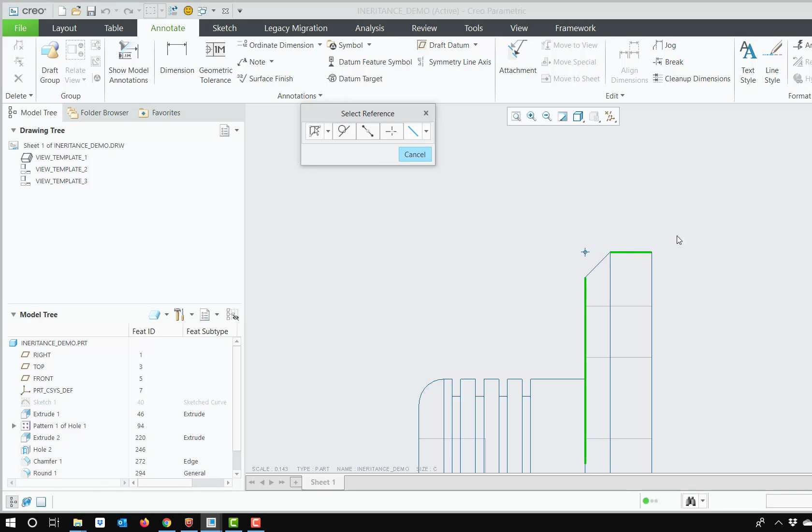I now will hit OK and tell it to grab that missing line. Notice it's measuring to where those two lines will intersect, and it could be at any angle, it doesn't have to be perpendicular like this.

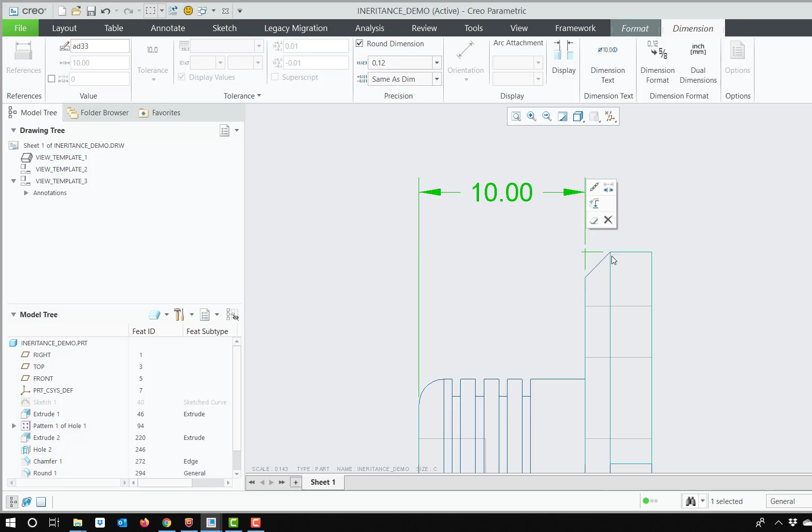Once that dimension is placed, if you go back and click on display in the dimension, and turn on enable intersection of witness lines, the witness lines will now show where that intersection is at, and it will overlap a little bit there. We can go into our settings and customize what that overlap is, bigger or smaller, but it will include an overlap now, where in older versions of Creo that overlap was not included.

One other element that is different within Creo 6 is if we include a table. So I'll come in here and click the table command. I'll do a 3x4 table and place it on my drawing. The delete key now will delete contents of a table instead of having to right click and use delete contents.

So if I type in names here, Mark, Tom, and Sam, if I no longer need the contents of one of those, I can select on it, hit delete on my keyboard, and it deletes the content. In older versions of Creo, you'd have to select on it and then choose the delete contents function here or from the dashboard to get the same command, whatever happens to be listed inside your cells.

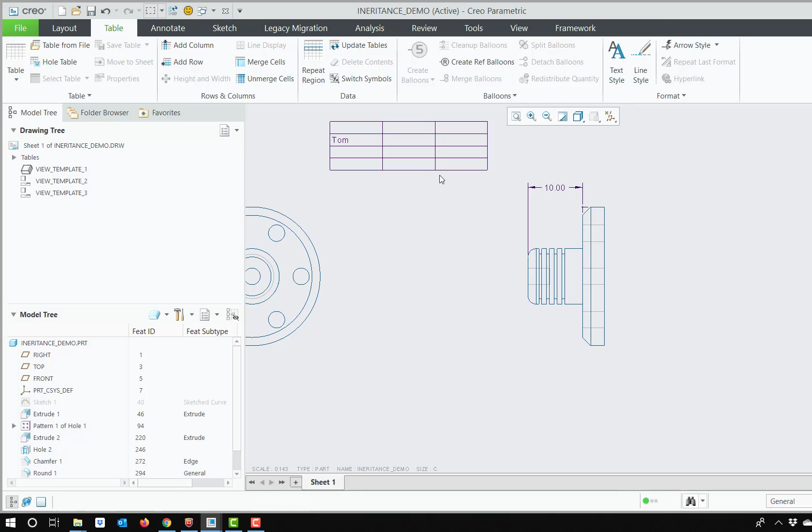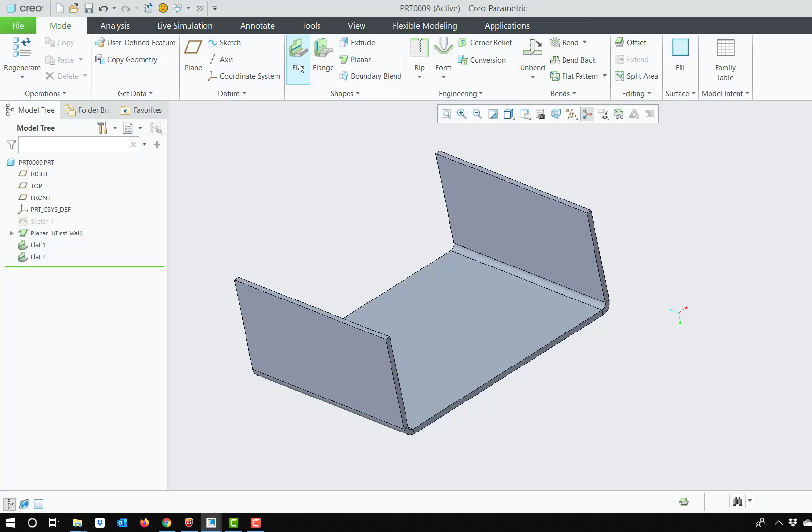Taking a look at sheet metal and how it's been updated in Creo 6.0, a few changes you might see: when building a wall using the flat command, you'll be able to select the edge and it will automatically detect the other walls it comes in contact with, or other boundaries to that wall.

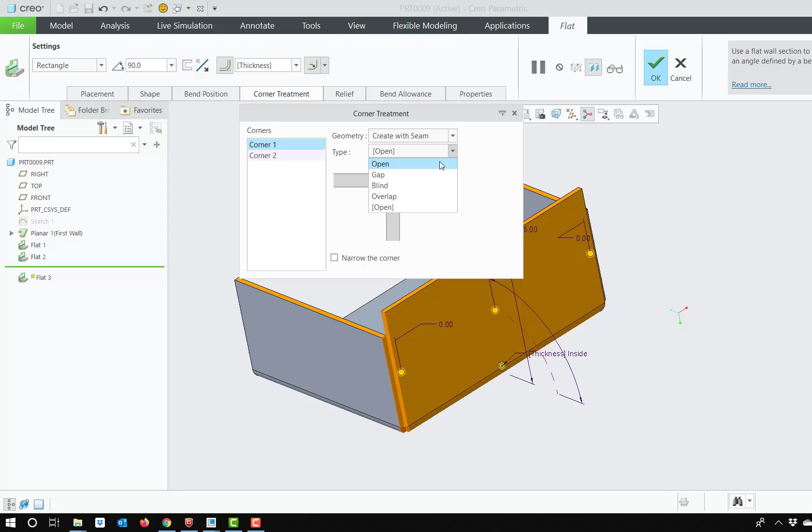What I mean by that is if I come over here to corner treatment, I can change the way the seam works, whether it is a seam or isn't. If there is, I can define it as being open or closed. If it is open, we can define things like if there's going to be a gap. Right now the gap is half the thickness of the model. I can make it 2 times the thickness, and we see not only the one wall we're creating is changing, but the neighboring wall is adjusting as well.

I can come in and set it to blind, and then define the gaps ourselves, whichever values we need on one side or the other. Define an overlap, so here's overlap on one side or overlap the other way, and they adjust.

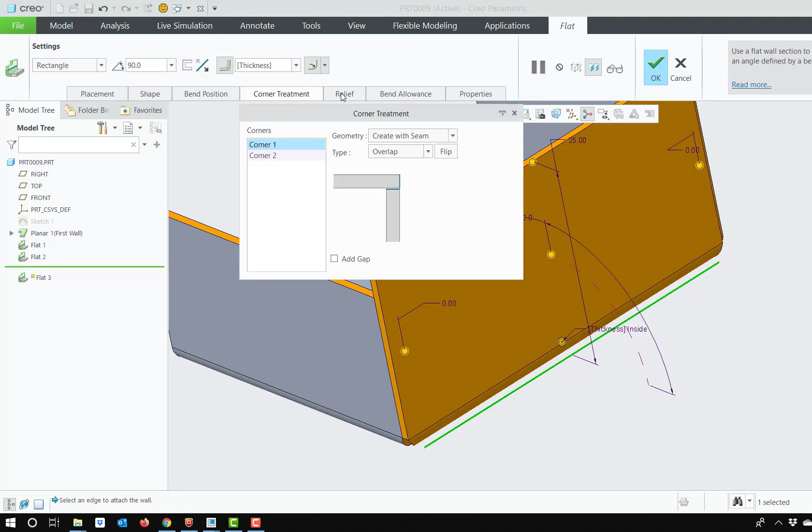Other thing we can do is go to the relief and define the relief for both walls at the same time. I can come in here and define it as being a rectangular relief, and adjust the values, or an obround relief, and adjust that. If we wanted to adjust the corner, not just the bend relief, we can adjust it so that here we have a sort of V-notch, a circular relief. We'll see it adjust here, and we can adjust the sizes of that here.

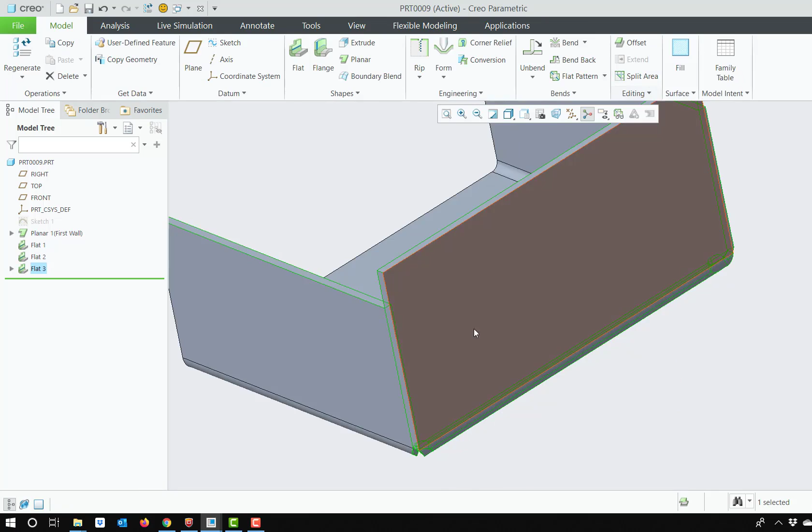Now it's set on a thickness. I'll make it 2 times the thickness. Hit the check mark, and now I can see that round relief that's been added to that corner along with all the other customizations. Basically they've modified it so that it automatically adjusts its neighboring wall rather than going back and manually changing it.

Other adjustments in sheet metal: there have been updates to the regenerate function so it regenerates faster. Things involving sheet metal cuts, if they are not affected by the modification, will regenerate faster and basically be ignored when the regenerate is performed, instead of having to go through and update all those features even though they haven't been modified.

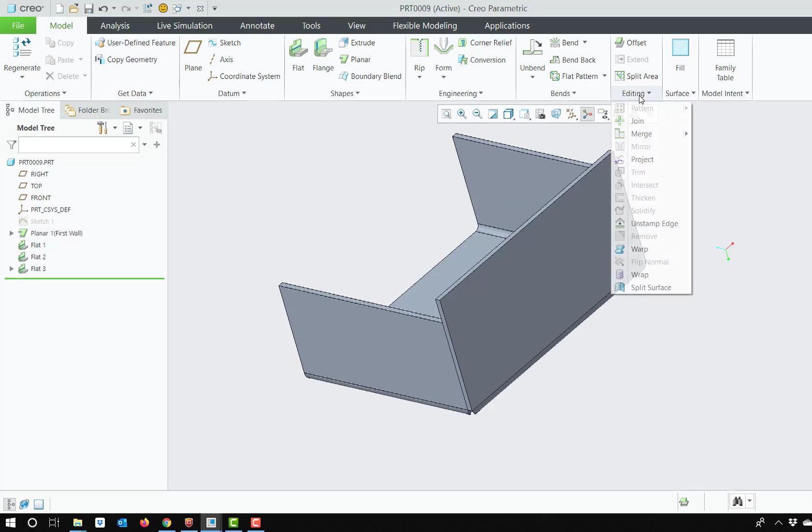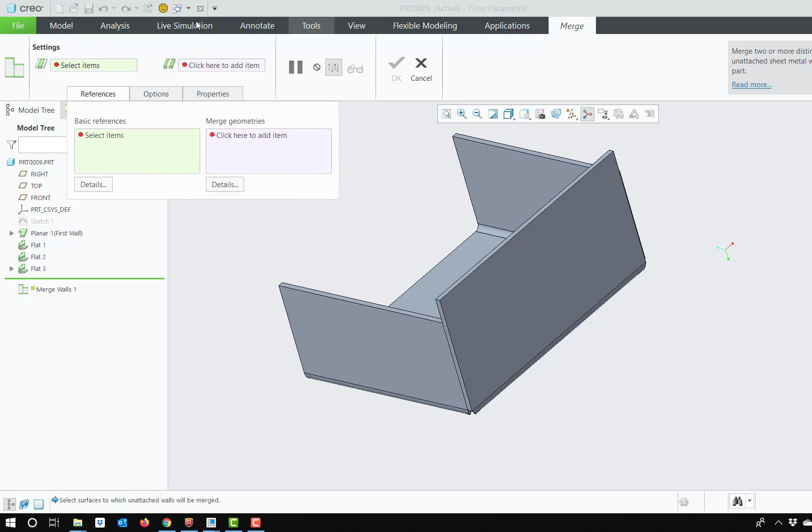One other change we'll see in sheet metal is if we go to editing, merge, and merge walls. The interface for merge walls has been integrated into the dashboard as opposed to having contextual menus. In earlier versions of Creo, you had contextual menus that asked you questions, and you had to click on them to select all the references. Now it's updated to the current version of Creo where you have a dashboard and drop-down menus to perform your different functions for merging your walls into one.